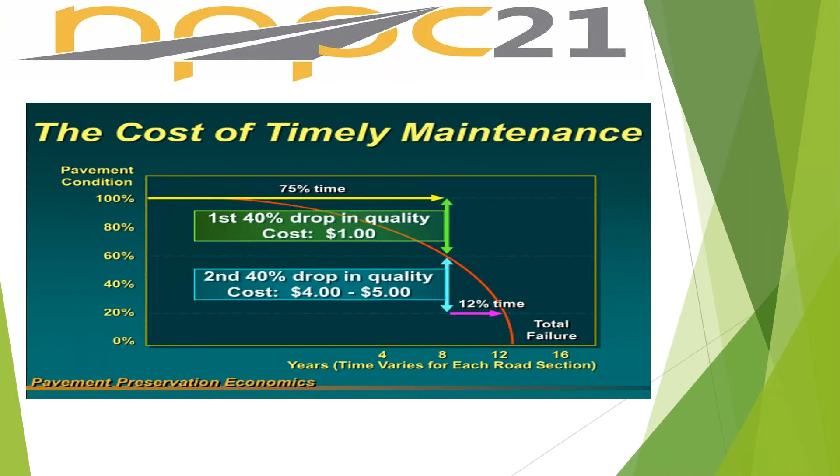I think what we've all come around to learn is the worst first treatment strategy is outdated and inefficient. It doesn't work anymore. This isn't an idea out of left field—it's proven that you can't wait till something's completely broke down and then expect to have enough money to fix that and keep within your entire system budget. The pavement preservation concept is the industry standard now, really. It's no longer a niche idea. It's what everybody is focused on.

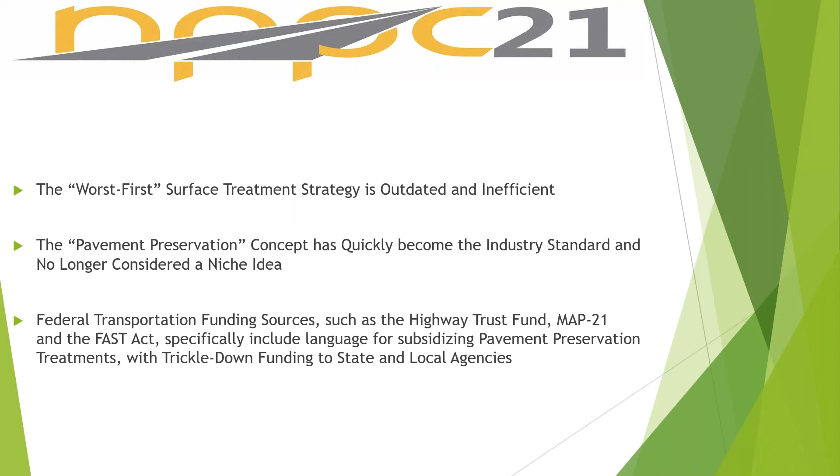Even the federal government, if they're going to throw funding towards a local agency to use these things, you've got to have a surface treatment plan in place that acknowledges you're using treatments that are cost effective, environmentally friendly, whatever it is. You've got to have a plan in place. So when we're getting money from the federal government, whether it's the trust fund, MAP 21, FAST, any of these, they all include specific language for subsidizing pavement preservation treatments. And of course, that money will eventually make its way down to state and local agencies. It's a big part of everybody's system at this point.

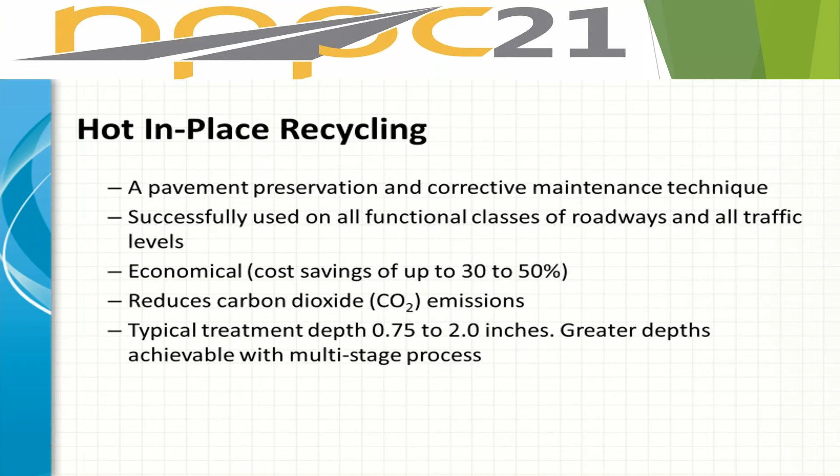Steve mentioned this, so I'll just briefly run through it. Hot in place recycling is preservation and corrective maintenance. It can be used just about anywhere, on all different functional classes of roadways. It's proven to be economical and environmentally friendly, and you can typically treat up to the depths you normally would using conventional processes.

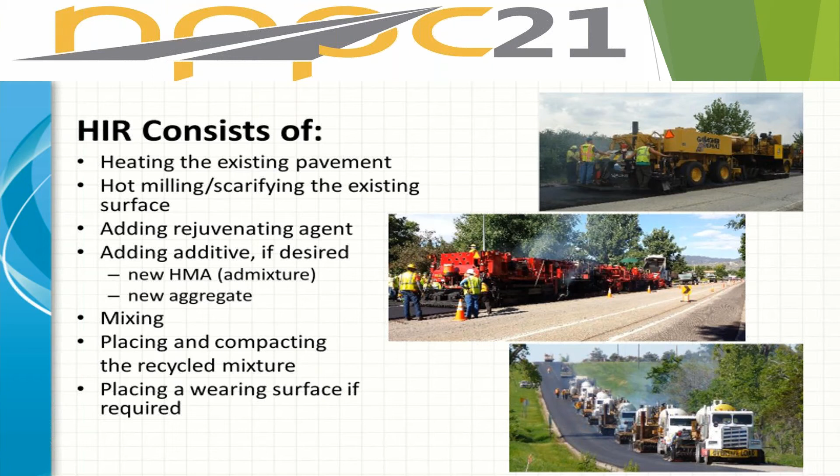In general, hot in place recycling treatments follow a basic few steps. All of these are going to heat the existing pavement. You're either going to mill or scarify that existing surface once it's heated and softened. Typically, you're adding a rejuvenating agent. In some cases, you could add new HMA, or even new aggregate, or new AC binder. All of these processes are going to mix that material in one fashion or another, and then lay it back down and compact it with conventional equipment. In most cases, you're going to need to place a wearing surface on top of the recycled layer, no matter what branch you're going off of here.

The equipment was spoken about earlier this week in one of the previous sessions, but in general, the hot in place recycling train is composed of a scarification or milling unit, a piece of equipment that mixes all that recycled material together, something that lays it back down, a recycling screed that spreads that out over the width of the road, and then your typical paving and compaction equipment at the end.

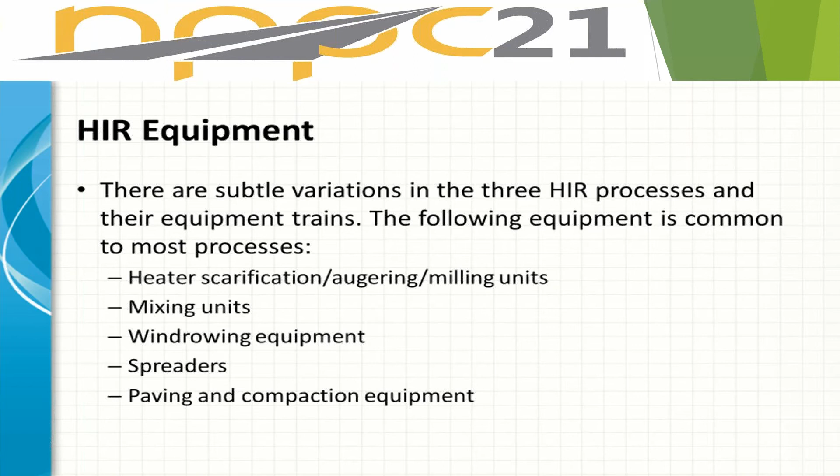Here are some examples of the preheater units. Their job is to dry, heat, and soften the existing asphalt pavement surface. You can have one up to five or six of these if you need to, in order to drive that heat down into the material you're going to be recycling.

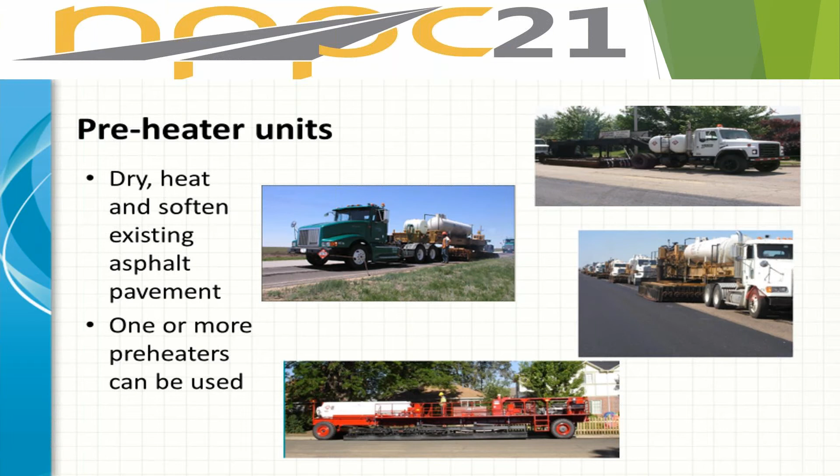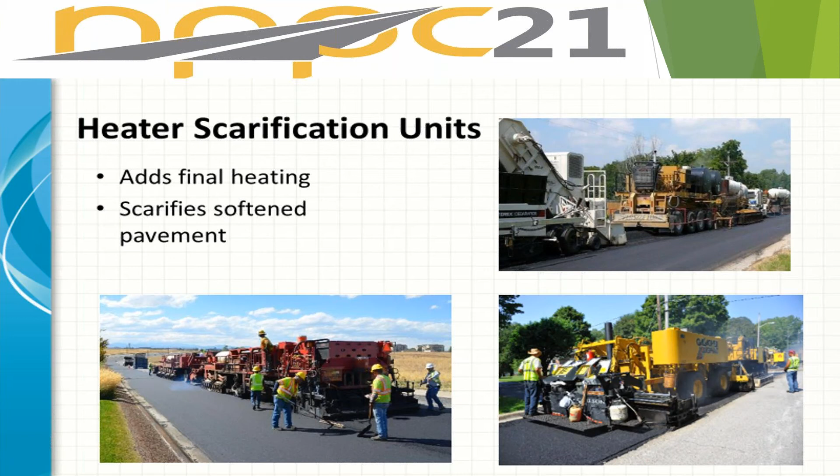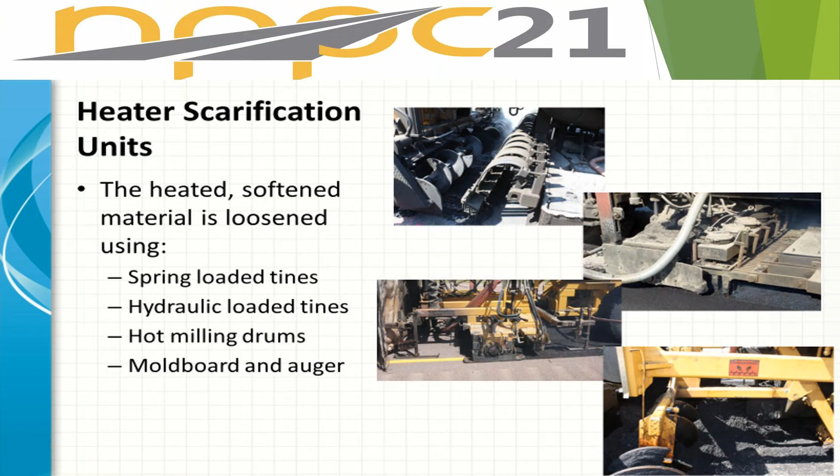Next come the scarification units. A few examples of those here—basically, once that top surface of asphalt pavement is heated, whether you're milling it, tining it, or using scarification teeth, that's what these guys do now: comb down or gather up that material that's been heated and softened. Here's some up-close looks at those scarification tines, scarification teeth; even small mill heads can accomplish gathering that material up.

Next comes the liquid addition part of the process. Usually, all of these different processes will add a rejuvenating agent at some point. In general, it's an emulsion, sometimes just a straight rejuvenating oil, or even a soft binder, applied to the gathered, heated, existing material that you're recycling.

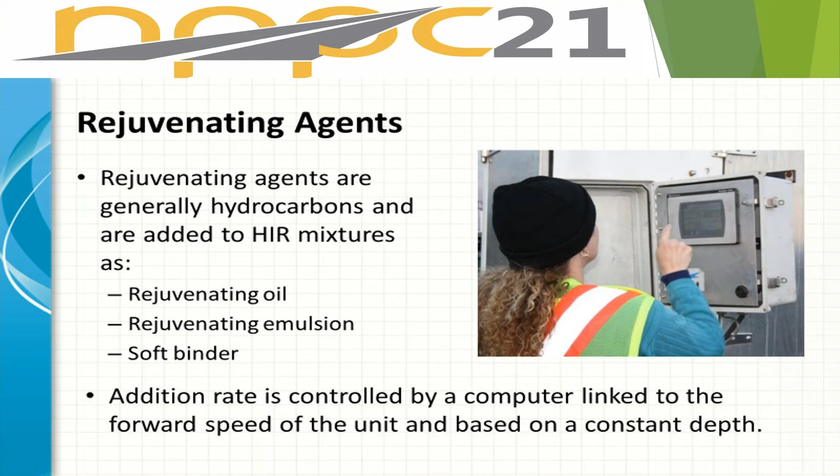Nowadays, that addition rate is controlled by a computer, as you see in the picture here, and it's tied to the forward speed of the train, so that you're adding a consistent amount no matter how fast you're paving down the road.

It gets added to the heated, loosened asphalt that's been scarified or milled up. It can be added prior to scarification, or after scarification, that material can be picked up and run through a pug mill or some type of mixing drum. All we're trying to do is reactivate that existing binder that's on the asphalt surface we're recycling, get a good coating. We're just trying to pump some life back into that material.

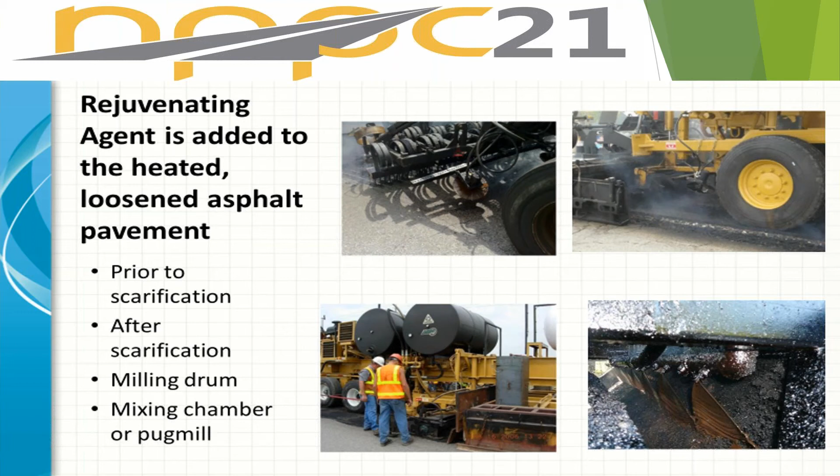So at the back of the train, after everything is run through the hot in place recycling process, it's very similar to a typical paving project. Single, double drum rollers, rubber tire rollers, it's very much the same. The benefits are that since it's a hot process, you've got a little bit longer rolling time to get that material compacted. And since the material you're laying down is hot, and the base you're paving on top of is hot, it forms a really good thermal bond between the base, the recycled material, and whatever overlay material you might be putting on top.

In some of these cases, a tack coat is not required since it's a hot process. It's already hot and sticky. You don't need to add anything else to accomplish that bond.

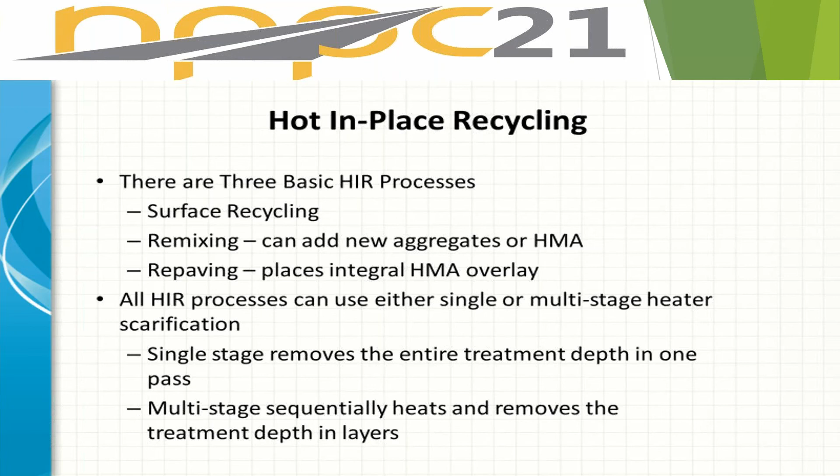So we'll get into the three basic hot in place processes. Steve covered those briefly, but you've got surface recycling, remixing, and then repaving. All of these can use either a single or multi-stage heater, and one form or another of scarification or milling. Single stage processes treat the entire treatment depth in one pass. Multi-stage, the longer trains, you do that in a sequence so you're not scorching the asphalt you're trying to save, removing just a little bit at a time and treating that until you finally get down to the thickness you want.

So the first one, and Steve mentioned it's the oldest, is surface recycling. All we're doing is heating that existing asphalt pavement. You could scarify from three quarters of an inch down to 2 inches of existing depth. You're spraying a rejuvenating agent on top of that, and then placing and compacting that recycled mixture.

In general, you're going to want to put something on top of that when you're all finished, whether it's another layer of virgin HMA or even a chip seal on top. But you're not really moving that material around. You're just recycling the surface, reactivating that binder, and then putting something on top of it.

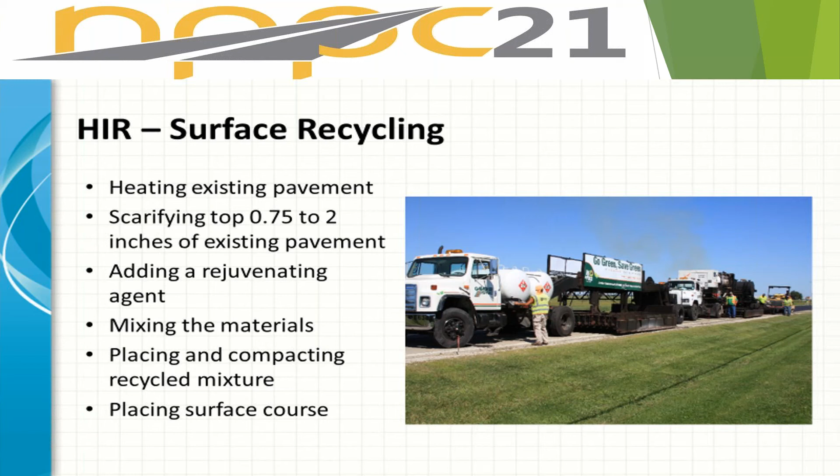Heater remixing is a little more on the heavy duty side of the hot in place spectrum. Again, you're treating the top surface down to 2 inches, sometimes 3 or 4 inches deep if you've got a multi-stage train. Again, you're adding a rejuvenating agent of some type.

And the key with remixing processes is you can add new material, whether it's new aggregate, new binder, or even just virgin HMA right out of the hot plant. You can add that to the material you're recycling to improve its engineered properties, and that's all done on the fly. So whether it's getting picked up in a pug mill or a mixing drum, you can tweak the material you're trying to remix by adding new components.

And then of course it's laid down. In most cases you're going to put another surface course on top of that. But in the warmer, drier climates, this can sometimes be used as the wearing course.

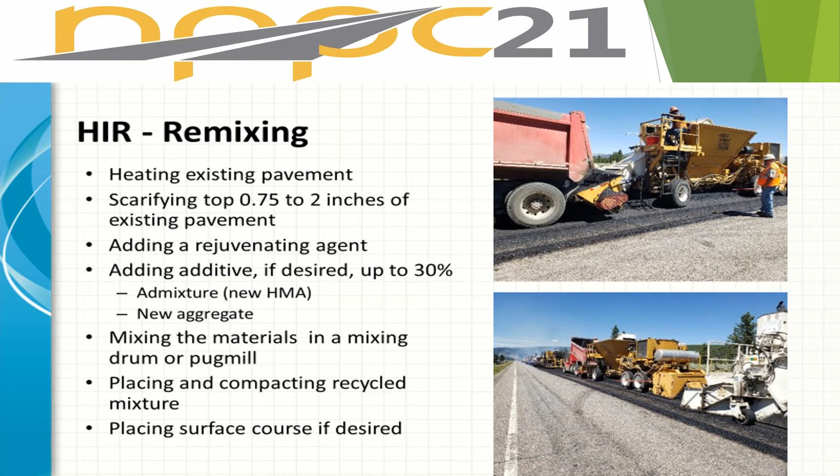And then the one that's right in the middle of surface recycling and the heater remixing is heater repaving. Same basic concept, you're heating the existing pavement. You can go down to about 2 inches of thickness. You're adding a rejuvenating agent, gathering that material, mixing it together, and then placing it just like the other processes.

The key thing with repaving is you're adding an integral asphalt overlay on top of the recycled layer. So this machine way at the back has got two screeds.

The recycled screed is laying down the recycled material, and new material from the hot plant is coming from the front of the train all the way to the back, and it gets placed right down on top of the recycled layer. So similar to remixing, except you're keeping the two layers separate, and the new material you're pumping into the process is your actual overlay wearing surface.

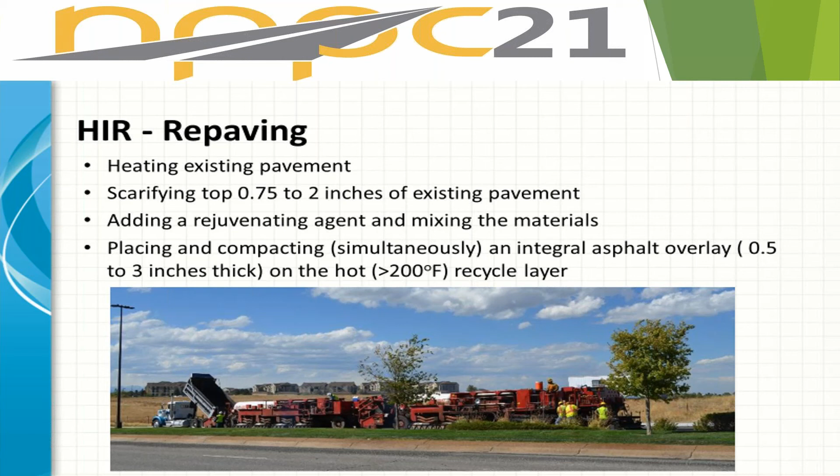The whole point of pavement preservation, right? We've all seen this a bunch: the right treatment, right road at the right time. Steve directed us to that road resource website. That's a fantastic place where you can get a lot of this information. You can play around with all of the variables, the condition of your roadway, the treatment you want to try to use. There's a lot of cost data in there, and I highly recommend this website to go and play around. You don't need to wait for somebody to come talk to you.

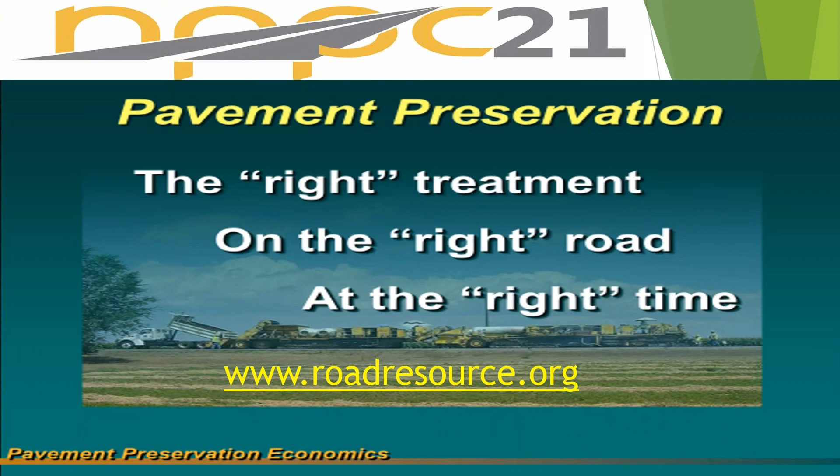You can jump right in and play around and see what might be available for you to use on your particular stretch of road. So again, this is a mid-level treatment. You're not doing something that is treating problems that are down below the top surface of your asphalt pavement. If there's subgrade issues or drainage issues, stuff like that, those are more of a reconstruct type of situation. Hot in place treatments is the upper 1 to 2 inches of the pavement, and these are some of the things that it is intended to address: raveling, bleeding, minor rutting, shoving, and then moderate cracking, reflective stuff. As long as it's not too terribly bad, you can handle longitudinal cracks. And then poor ride quality. If you've got some minor bumps and dips, these treatments are intended to improve those things as well.

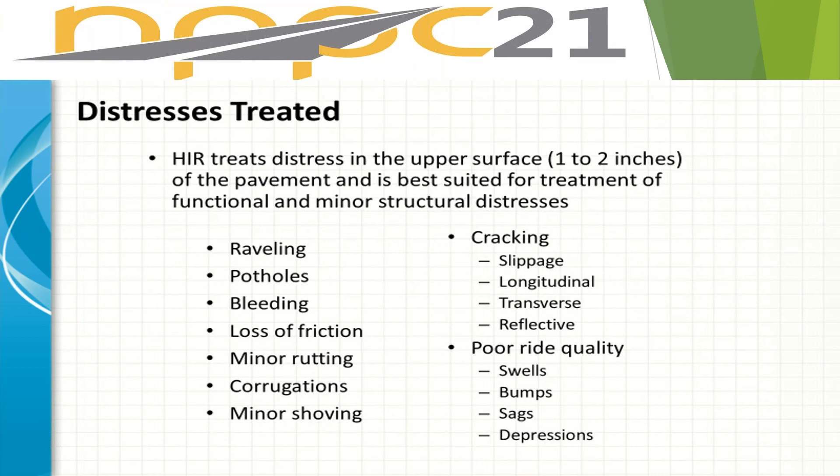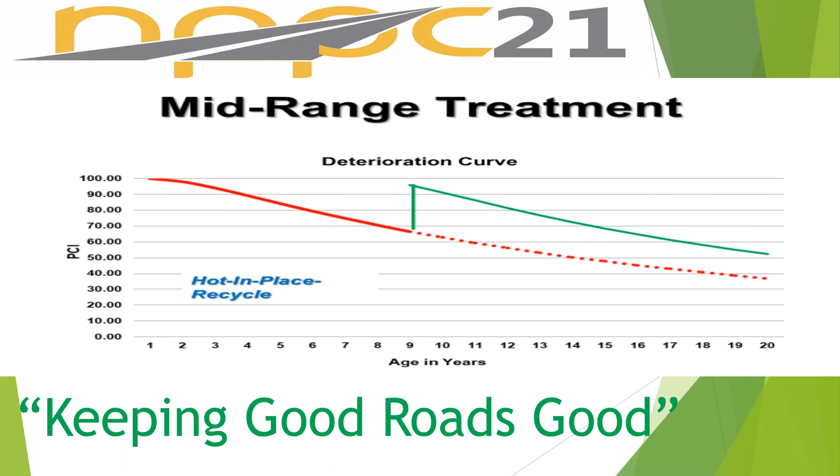Same old deterioration curve. It doesn't really matter what your index is, but you want to try to catch the condition of your road and improve it before it gets too far away from you and it becomes a real expensive problem. So this is just showing that hot in place, you get in the 60 to 70% condition index, maybe 8, 9, 10, 11 years down the road. That's the time to do these treatments and get your quality of your roadway back up to where it needs to be, and maximizes the lifespan of that road.

We talked about all this delamination. If you have a patchwork of utilities on your city streets and you want to make everything consistent and looking good again, as long as you don't have really deep raveled cracks or alligatoring, those are obviously problems underneath, and doing something on the surface isn't really going to do much for you in the long run other than cover up the problem. So we try to stay away from those and just target things that are at the top.

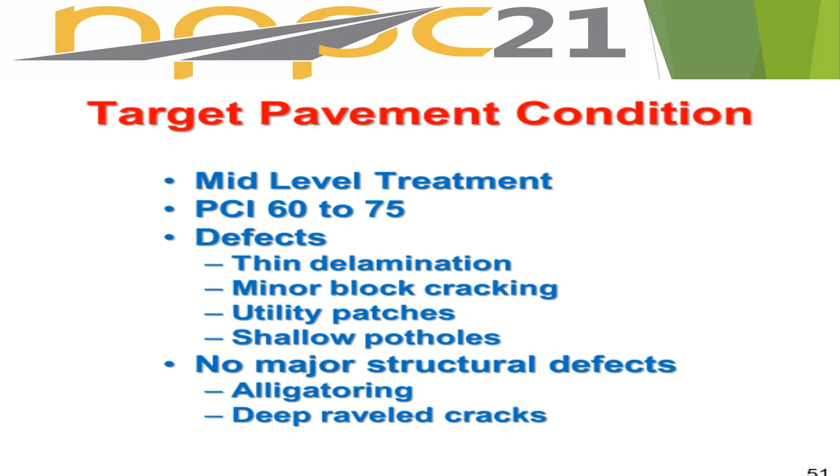Steve showed the project selection chart that's in the BARM. This is just an example of one from a state DOT. Everybody kind of has their targets and what they feel that all three of the HIR processes can accomplish. So same thing in the BARM.

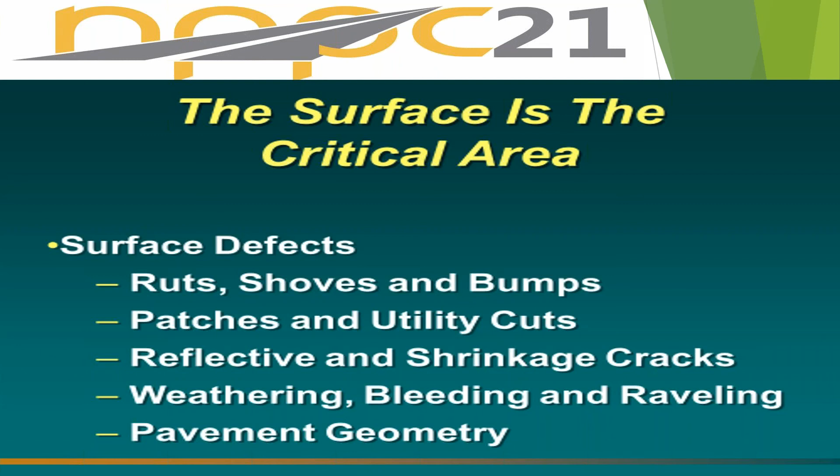Again, it's meant for the surface area. That's where most of the damage on an asphalt pavement occurs. It's from traffic and weather. So when your pavement starts falling apart at the top, just like maintenance of your house, you put a new coat of paint on that, probably get you a few more years of protection and looking good. If you just leave it to go, you start having deeper problems and it costs a lot more to fix. So everything's at the surface, and these are all the things that these hot in place processes are intended to address.

It's mid-range treatment. Again, photos aren't necessarily the best way to pick and choose which treatment you want to use, but this one's not bad. You've got some moderate cracking, longitudinal, some thermal transverse cracks. You might have some utility patches. Your curb and gutter might be covered up from years and years of paving. So some of these things where you're just treating the surface and recycling what's there, this looks to be a good candidate.

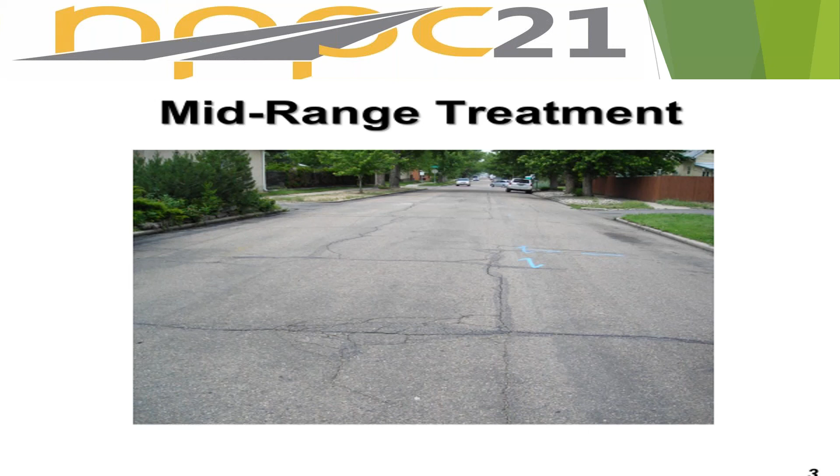So at the end of the day, the thing you're trying to get out of an HIR process is eliminating those surface irregularities, addressing cracks, restoring that grade line and cross section. Your ride should improve. You can get just as much production out of any of these hot in place processes as you would a conventional mill and overlay process.

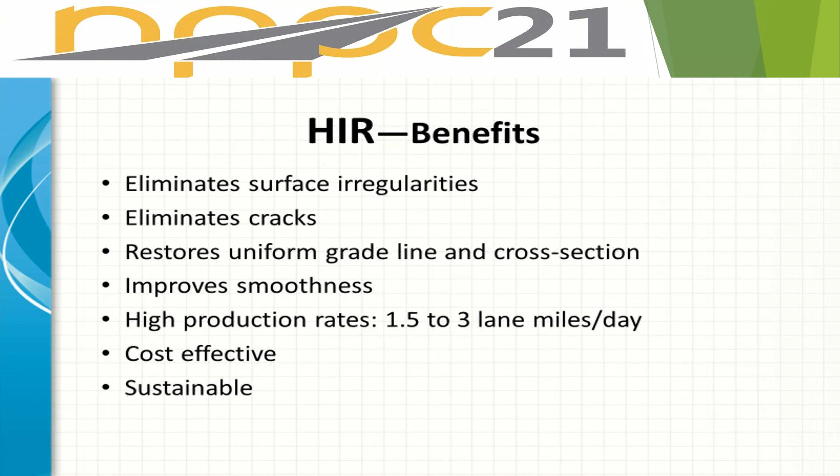The real key is that it's cost effective. The material savings that you'll see out of these: you're recycling material that's in place. Agencies have already paid for that once when it was paved originally, so why not continue using that material that's there? So material cost effectiveness is big, and then obviously it's a recycling process. It's proven to be environmentally friendly and sustainable. You're reusing something that's already there.

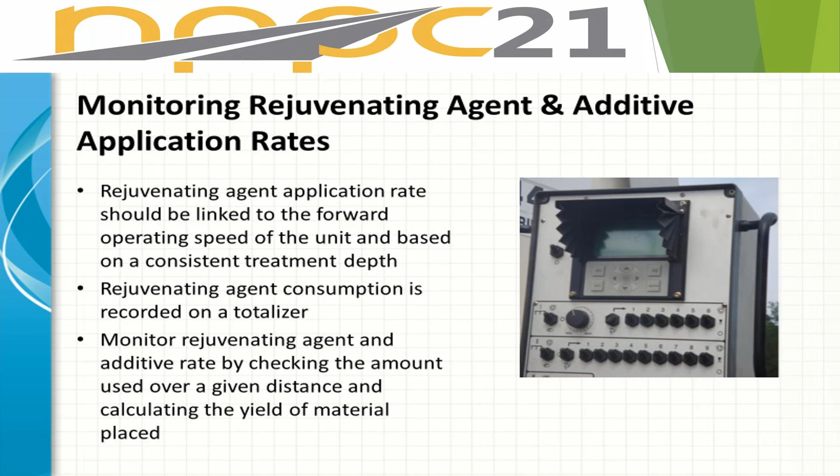This gets into a little bit of the processes, monitoring the application rate of the rejuvenating oil that you're putting in there. You check temperatures just like you would a normal paving project. What we're trying to accomplish with all of these is recycling the asphalt that's there. You don't want to do something that's so hot that it chars that asphalt. And that's the whole point. We're trying to just reactivate that binder that's in place so that it becomes a good leveling course or a riding course in some cases. So temperature monitoring is key.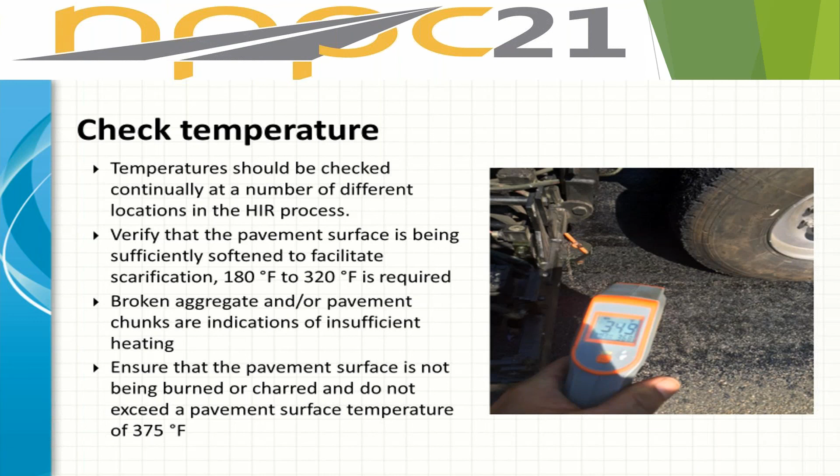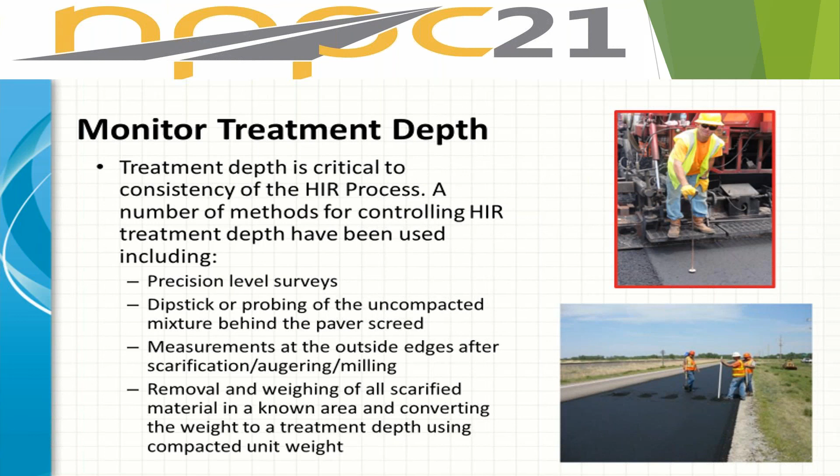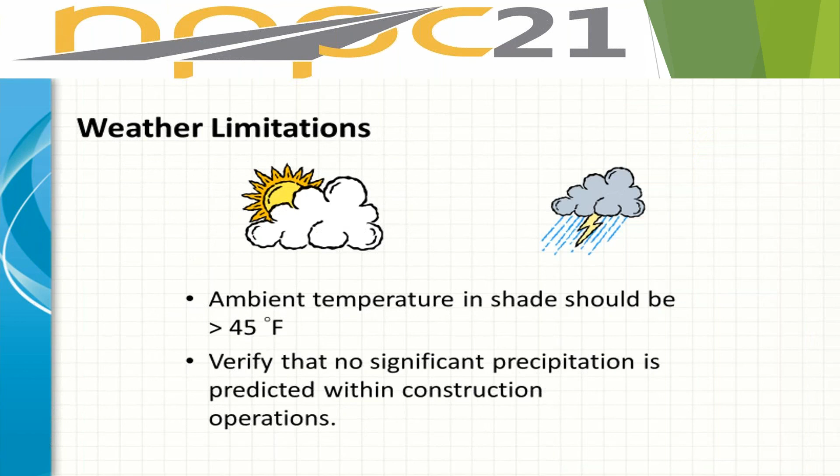Then those treatment depths, you've seen the scarification tines, teeth, milling head; keeping a good constant recycling depth goes a long way to an improved product. And weather limitations, similar to regular paving operations. Most places you need to be 45, 50 degrees and rising before it's a good day to pave, and you want it to be dry.

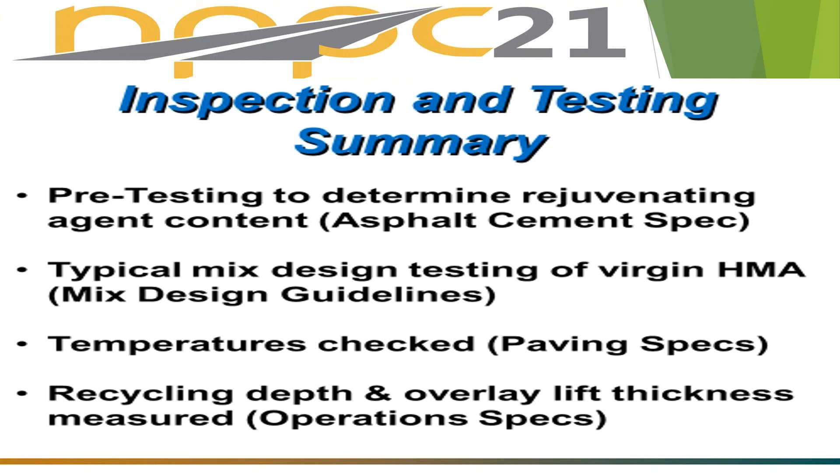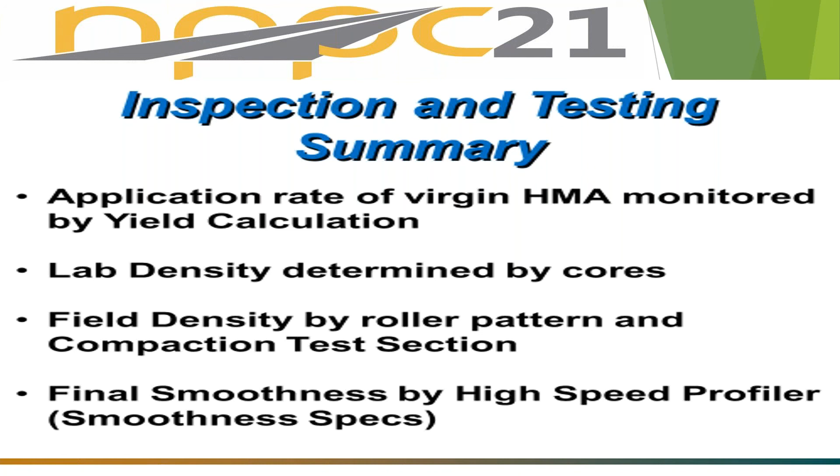Here are some of the things that stand out for inspection and testing of hot in place processes. You're keeping a good account of the rejuvenating agent application rate. Usually it's a typical mix design, just like a virgin HMA overlay would be. Again, temperatures are key, and that recycling depth. And then the following overlay thickness needs to be monitored. You can do yields, lab densities, field densities, and then final smoothness by high-speed profilers are very, very typical on a hot in place project, just as a regular HMA paving project would have.

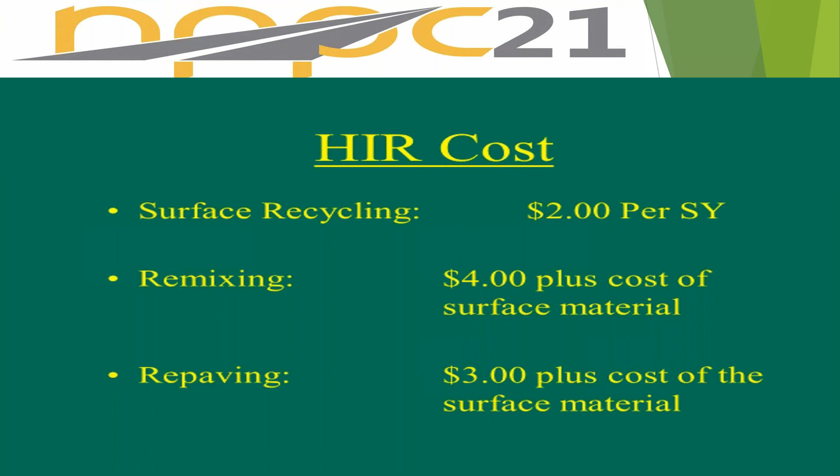And finally, these are some reasons that we've all seen that agencies use HIR. It's a good mid-level treatment. Most places have roads in their system that are so far gone that they need to wait for some reconstruction. Some places have very good new roads that don't need anything right at the moment. But for the most part, systems have a lot of mid-level condition roads that could use a little love right now before it gets too far down the road. So that's the main reason we see agencies using these.

It's environmentally sustainable. You're milling less, trucking less, using less raw materials for your pavement as compared to typical mill and overlays. Most places have acknowledged that it's a similar lifespan to a 2-inch mill and overlay. In other words, if you're recycling an inch and put a new inch on top or within the system, you'll get a similar performance as a mill and overlay. You can use all of these with specialized mixes, your SMAs, warm mixes, in conjunction with these hot in place processes.